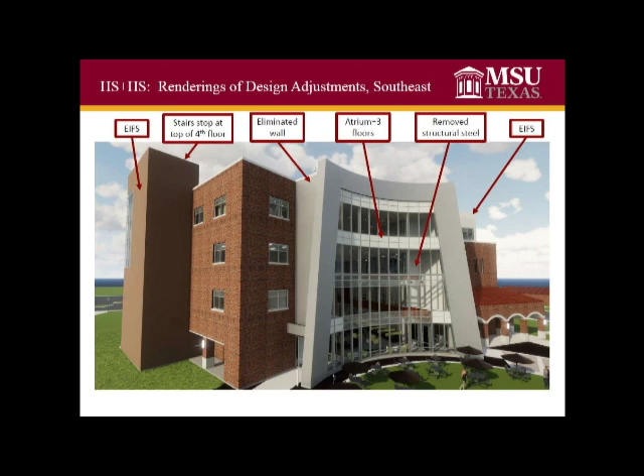Okay, thank you. Okay, this is the southeast view of the building, and these 3 areas are going to become EIFS or brick potentially, and these stair towers will be reduced to the same height as the rest of the building at 4 floors.

This west entrance was kind of a hot box because it was all glass. We changed it to this design, a little more traditional. Personally, I like it, it's better than the other thing.

This slide and the next one are kind of very similar to what we just looked at, but we'll look at them nevertheless with the EIFS on these sides and the east or west entrance modification.

Kyle, are you saying that the brick you're thinking about doing is going to be a second type of brick other than what's below here? Or is it all, I'm sorry, yes, this is our traditional MSU brick, right? And there are 5 different brick types that go into obtaining that look.

So the thought is that maybe we take, let me zoom in, but there's some lighter bricks there and use those just in this area. Or maybe the one that's a little more pink goes in this area.

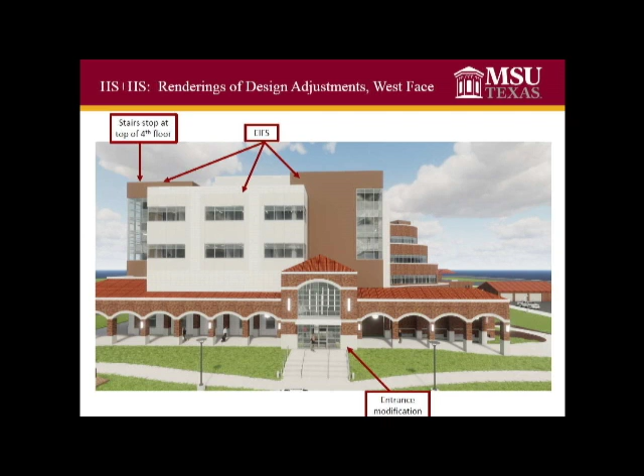Again, this is kind of the same view that we were looking at, just a little more from the northeast to northwest corner. Same issue with the EIFS, or lighter colored brick, and the entrance modified there.

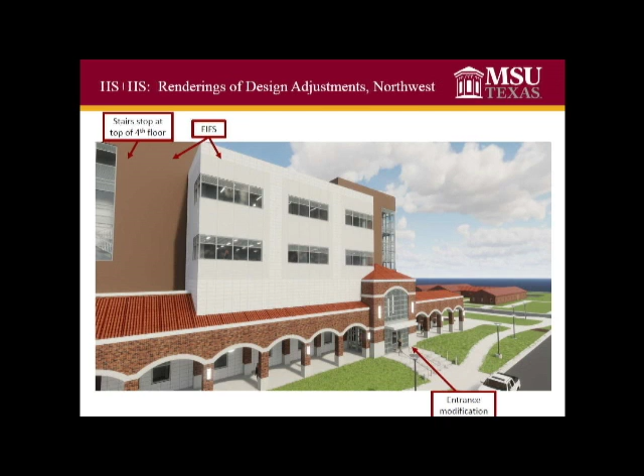From the interior, this would be as if you were standing at the glass wall looking back into the building, and you can see we're at 3 floors here, still has a pretty open wow factor with it. The glass elevator has actually been removed. It will be a standard cab.

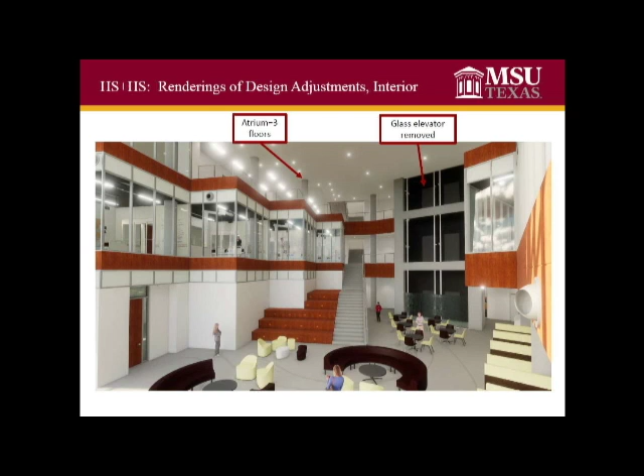The next view will be like we're standing about where that person is, looking out to the east. Here we are, and you still have the large glass window view, and again you're looking at 3 floors. I don't have a good shot, but this is that one sim lab that they wanted to really highlight and still be able to see from the other floors. So it will still be visible from the 3rd floor at least.

Kyle, when you say they removed the structural steel, what impact does that have, or why was the structural steel there in the first place?

It helped support this glass structure initially, but now the way this type of framework is tied into the rest of the building, instead of almost like a separate structure that was just holding that glass wall before, this doesn't require it. And I think when we see there's a rendering of the interior from the old version, you'll see all that structure and it goes away. To me, it was strictly for aesthetics.

Okay, it wasn't integrity? No, there's no chance of this being less structurally sound because we removed that. No, we couldn't do that. So. Okay.

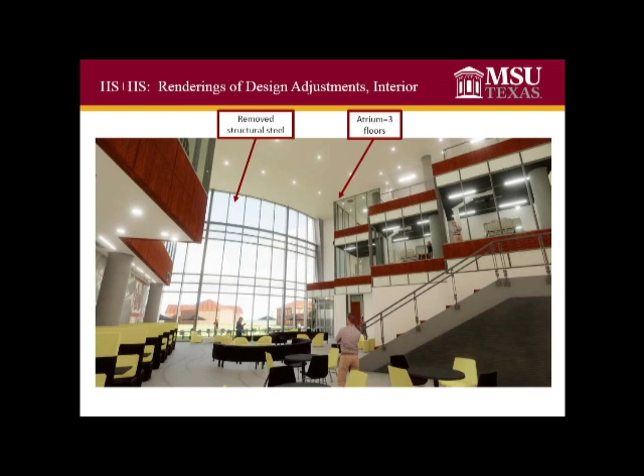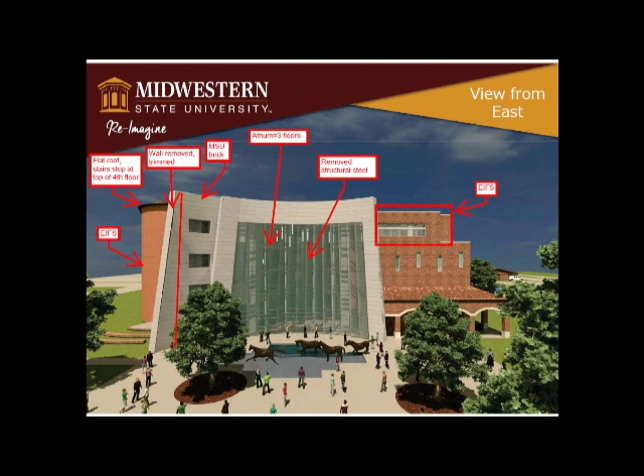This wall was trimmed off, and this became the MSU brick. You can kind of tell, you see some gray lines through there - that's the structural steel that we would have seen. And in the newer version, there was kind of a white barrier in there that's separating, so it was hiding the floor of the 4th floor. But you won't see that here. And then this, they changed it to EIFS. Again, would probably change it to a single color brick.

From the northeast corner, again, same issues there, and they've changed all this to a single color brick. The EIFS on the stair tower will become single colored brick. The penthouse will no longer be there to that extent, and of course you will not have the Spanish tile on the top.

You have to put a different coating on the air handler, but it's no loss to the building.

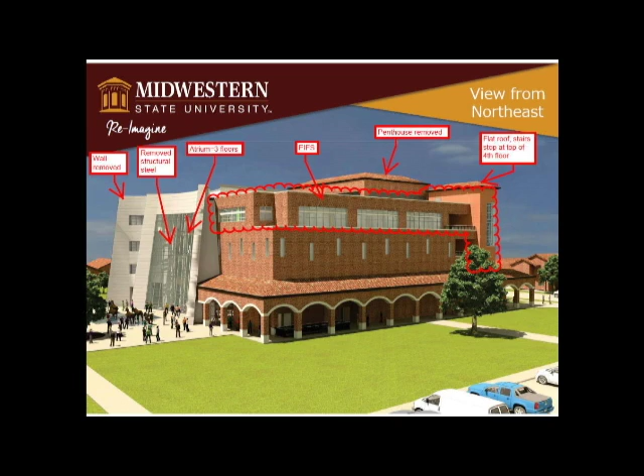So Kyle, I think what's interesting about this is when you look at where you have the EIFS, you can see the textures in the tile. That was a textured tile, and that's why Dr. Follet suggested we look at brick, because you'll get your texture back, which will be really interesting, instead of just a flat stucco. So we're pretty excited about that.

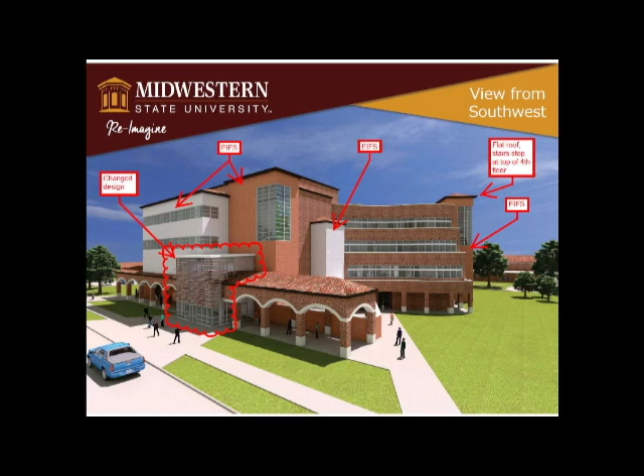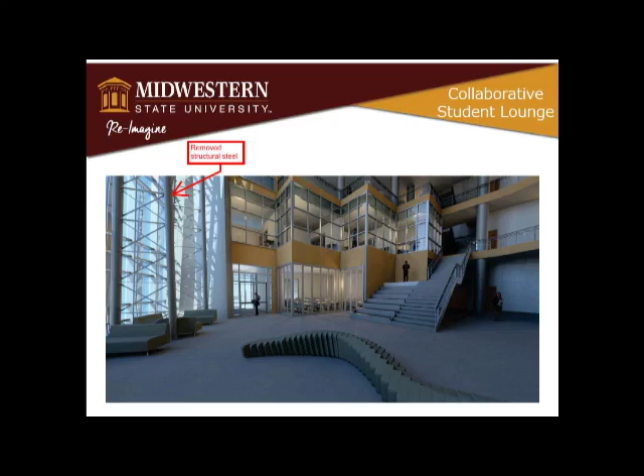Replacing that terracotta tile saved us almost $700K. Going with a 3-story atrium saved us over $600K, and that had a lot to do with being able to eliminate the smoke evacuation system because it was a shorter atrium. And then these glass wall changes, the structural steel was removed out of it, saving $400K.

A lot of the steel in the stairwells was going to have fireproof paint on it. It's very labor intensive, took many coats, so instead of doing that, there's going to be sheetrock over it. And $300,000, that's a lot of paint. So it's well worth doing that. Nobody's really going to notice it.

Penthouse size was reduced, and the elevator was replaced with a standard cab instead of glass.

And to review our budget, really up till October of this year it was a $29.25 million construction budget. It's now at 33.5. Equipment was at 4.1, we're now at 3.1. Furniture, relatively the same.